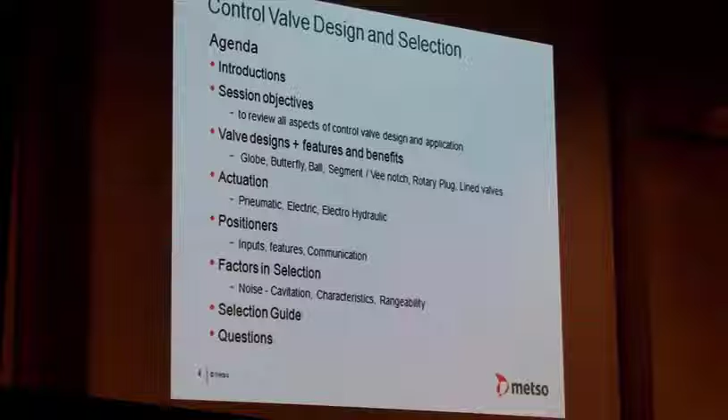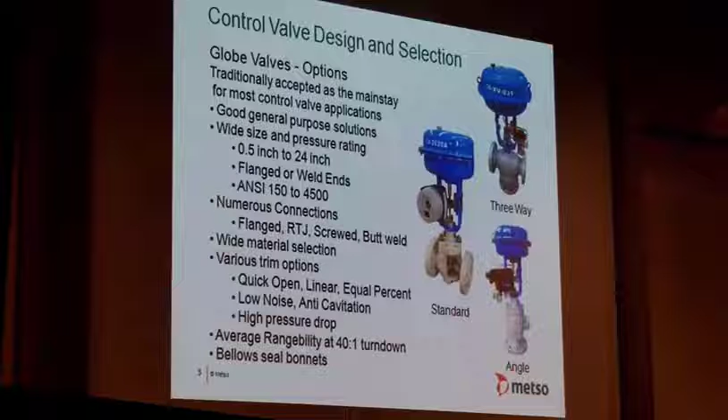Okay, moving on now, the first one is going to be your globe valves. Globe valves have traditionally been accepted as the mainstay for most control valve applications. Wherever you go in industry, whichever plant you're on, you're going to see loads of globe valves around. They've been there for years and years, and historically they've done a really good job. So they're good for general purpose solutions.

When you see them, you're going to see them in three forms. The first one is the standard format—here you've got your globe valve body and your actuator. Globe valves are sometimes referred to as linear valves, because the action is a sliding stem to lift them in and out. So here you've got your globe valve, your linear actuator, which is a diaphragm in this case, and then your positioner on there. I've got a little valve I'll pass around in a minute so you can have a look and see what one looks like on the inside, and then you'll understand what I mean.

This is where they come in really, because they're a wide size range and a wide pressure range. These things have been around for ages, so they've been designed to do all applications—typically half an inch up to 24 inches is the kind of size range you'll see for globe valves. But you don't want to be buying 24-inch globe valves unless you have to, because they weigh absolute tons—just massive things.

So here's where I'm suggesting you think about different options when doing your valve selections. Typically flanged or weld ends—the weld ends you'll tend to see predominantly in the power industry, so if any of you work for power plants, you'll see them there. But normally they're always flanged. Pressure ranges go from ANSI 150 up to ANSI 4500. Some might think ANSI 4500 is quite high pressure, but if you've worked on polyethylene plants, the reactions take place at around 3000 bar, so you need control valves that operate at those pressures.

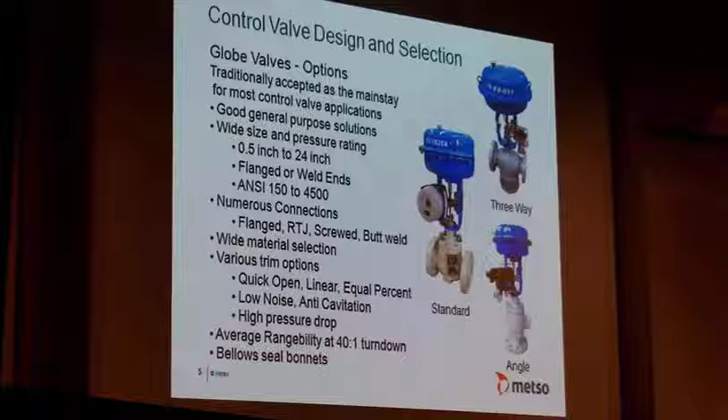The other area where you need to be careful with globe valves is if you're dealing with a very light hydrocarbon, because the gland systems are never particularly good - as the valve is opening, the stem will actually drag the products out with it. So what you end up doing is putting bellow seal bonnets on. Bellow seal bonnets cost a lot of money, and they're very limiting in the number of cycles you can have.

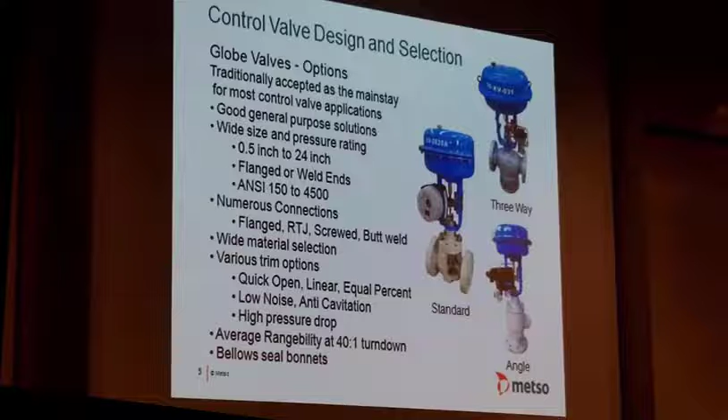So here are the three forms: standard globe valve, and occasionally you're going to see an angle globe valve. You're only going to see angle valves on the more aggressive applications, the specialist applications, and also on three-way valves, where you might be doing a job involving heat exchangers, or maybe tanker loading systems. So those are the sort of things you're going to see them on.

Moving forward to what's actually going on inside - if I pass this little demo valve around, the valve coming around is what's called a top-guided unbalanced control valve. The idea is the flow will come in underneath, and the plug is just a plug, like a piston, so whatever pressure is acting on the underside of the plug has to be taken care of by the actuator. So you have a limitation there, and then the flow will exit through the valve and come out. It's not as heavy as it looks - it's made out of plastic, so it's nice and light. Pass that one around as you go.

Now, here we've got the new designs of valves, but here we've got the old-fashioned designs. I'll leave this in my presentation because when you go around a refinery, you'll find hundreds of these things, and the actual refiners love them. The reason being it's very old, very simple, very robust, and maintainable. As a manufacturer, the idea is you want to make it simple, cheap, and economic to manufacture, but by doing that we've brought limitations in. So you have to weigh up the limitations now versus the old technology.

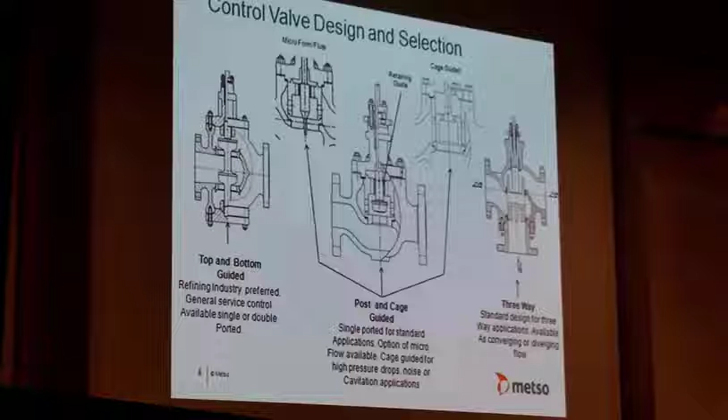So you take your pick. I think the only time you'll be using the diverging flow in a different application would be on something like a tanker loading system, where your flow would be coming straight through the valve, and then as you open this port it will allow you to discharge the flow into the tanker. So that's when you will be seeing that sort of construction.

Now moving forward to the angle valves, as I say, you won't see these very often. They tend to be for very specialist applications. So here we are talking about applications like compressor anti-surge valves, high pressure gas letdown valves, wet steam letdown valves, and boiler feed water control, where you'd need multi-stage trims.

Now with angle valves, you've got two ways of using them. If you're going to be using them on a gas application, the key factor within the valve is going to be velocity, because normally on a gas application you're talking about noise, and you've got to keep the velocity down to 0.5 Mach.

So what they will do on a gas valve is have your flow coming in from the underside. Typically here, you can get different sizes of bodies and trims.

An application I'll give you is one I did about 2 years ago for Valero Refinery, where they were looking for a valve on a wet gas compressor. Basically you've got a 16-inch outlet, with quite a high pressure drop, discharging to flare. So to keep the velocity down, they ended up making the outlet a 24-inch outlet. You basically fabricate the valves to suit all these different combinations.

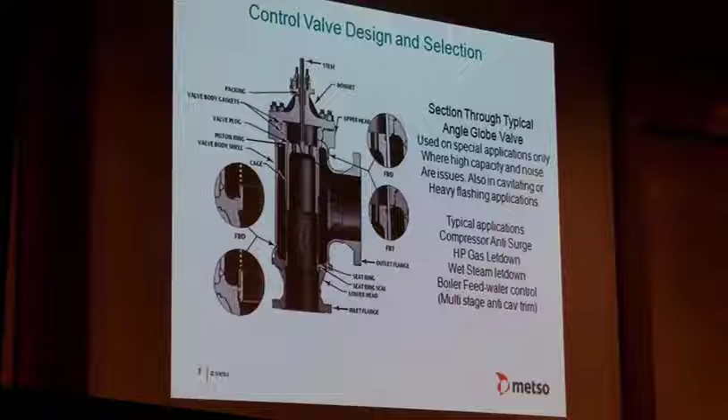Now if you're working on another application, which might be difficult, say wet steam - wet steam is extremely erosive. So instead of running it the normal way, where you'd be discharging the wet steam into the body of the valve and wearing the body away, instead you bring the flow in from the horizontal side, through the trim, and discharge the wet steam straight out. So where the flow stream exits the valve, it's ejecting straight out, not wearing away any of the castings or bodies. It's a simple construction to do.

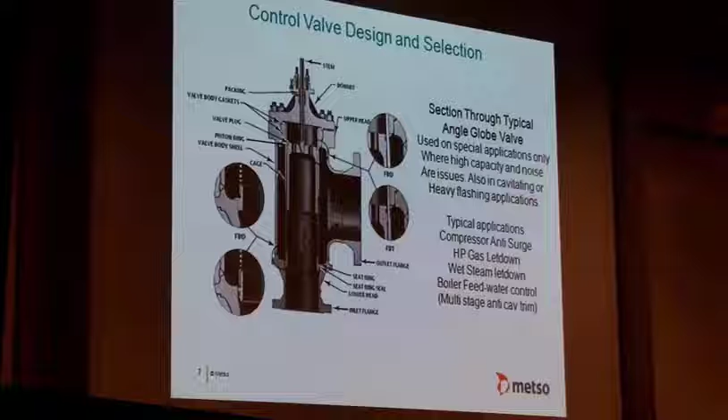And if you're looking at applications with multi-stage trims, instead of having a single trim, you will have multitudes of trims coming down below. Fisher, for instance, do a Cavitrol 4, which has 4 separate stages coming down, and that will allow you to drop 160 bar pressure without generating cavitation in the trim.

Excuse me sitting down, I've got a trapped nerve in my back.

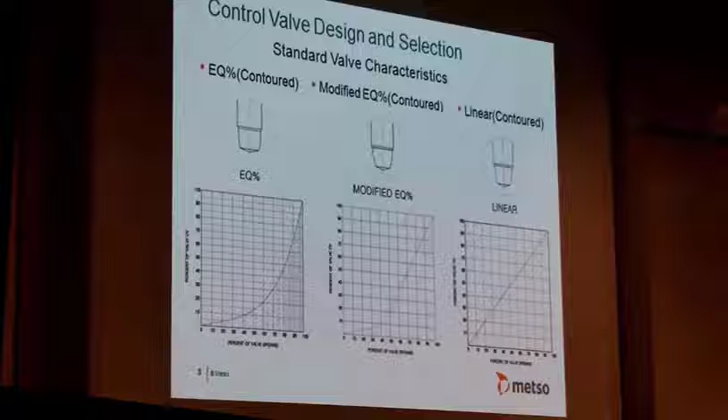So the manufacturers came up with this idea, and it was like a halfway house, meaning you could have one valve that would do all different applications. It's a bit of a cheat, but you get away with it. But what you'll find is that most people will specify these trims for the applications, because that's what's traditionally been used. The history of these characteristics goes back to when you used to have pneumatic control systems.

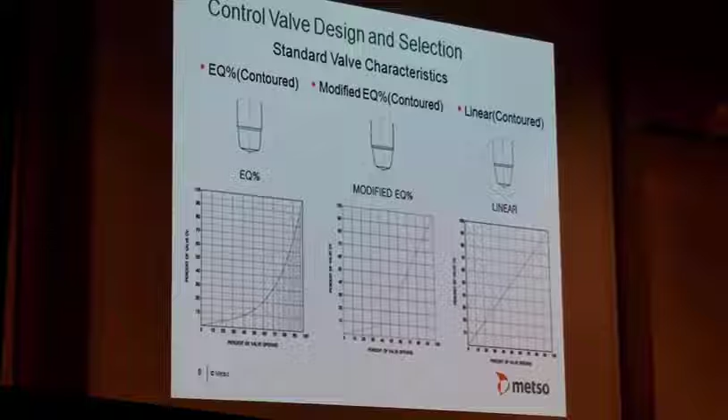So when I used to start, you had a blind controller, as it was called, just downstream - the old Fisher Wizards. They used to measure the pressure, and to get the right performance of control, you had to modify the trims, modify the characteristic to deliver what you want. In modern DCSs now, you can basically do what you want with any of the trims just by doctoring the output from the DCS. But we like to stay with tradition.

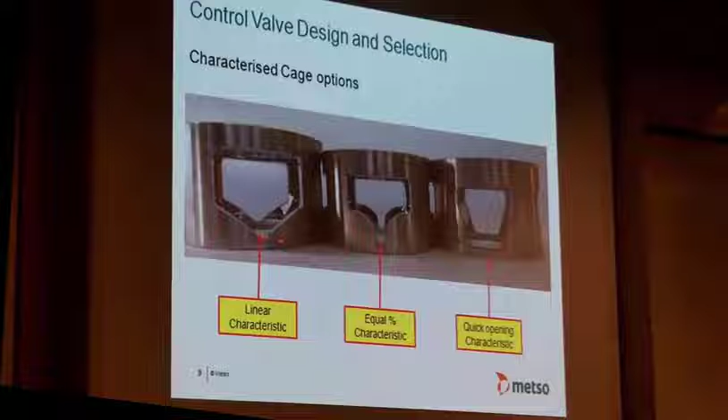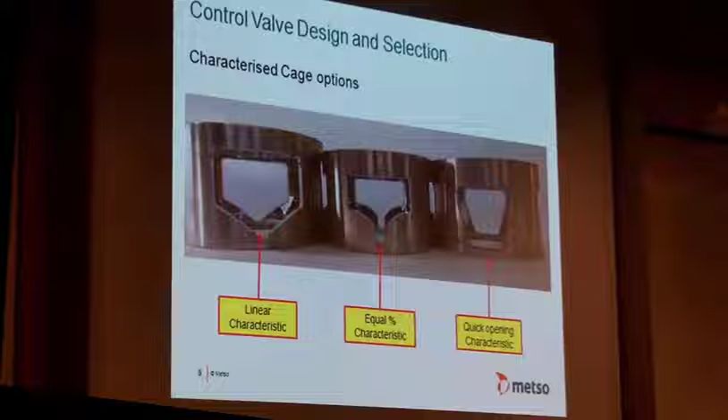Now, when you've got the cage-guided valves, which is the balanced construction, the actual characterization is done by profiles which are in the cage of the valve. Here you can see a linear characterized cage, an equal percentage characterized cage with this rather strange curvature, and then a quick opening one, which is the kind of trim that you've got in my little demo valve that's been handed round.

So that passes on from the globe valve side. The next section we're going to be talking about is butterfly valves.

Butterfly valves, I believe, have been quite misunderstood over the years, because originally when they first came out, salesmen were selling them for all manner of applications, whether they were right or wrong. The reality was they got a really bad name about 25 years ago, and people started saying, I'm not buying them because the control is rubbish.

But if you buy a butterfly valve which is selected for the application, then you get a unique thing, because you can have really large sizes of butterfly valves that weigh half the weight of a normal globe valve and are like a third of the cost. So there's a large amount of money to be saved by considering butterfly valves, providing you select them for the right application. They're available in various forms - some are for control and some are for isolation.

Good for general control, but here's the buzz, if you like - you've got to be careful with the pressure drops. Some people will tell you can handle 10-15 bar pressure drops on a butterfly valve, but my gut experience is just to stay around about 5 bar, because what happens with butterfly valves when they're working is you get turbulence forming around the backside of the disc, and that turbulence will cause oscillation, which will then be reflected in the control. It will also be reflected in the maintenance levels of the valve, because you'll start to shake the valve to pieces and wear it out.

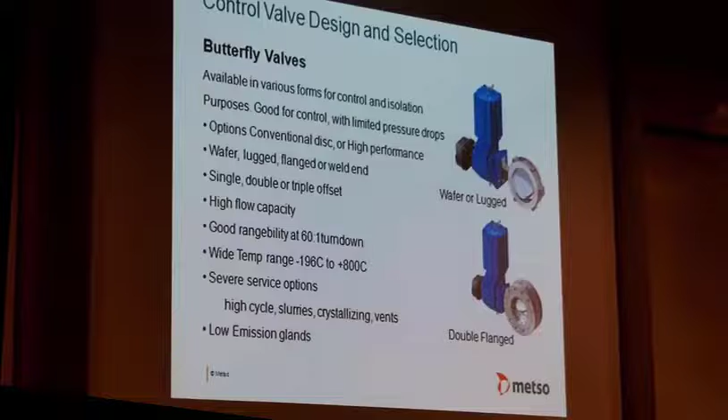And here's the other thing as well now which is coming in. If you think about what we said about the globe valves with the rising stem, where you're going to get product coming in, being drawn out with the stem - with a rotary valve, it's a little bit like the engine in your car. You very rarely get leaks from your engine nowadays, whereas you're always going to get leaks from the linear side of things. So it's a simple option.

So I'll pass this valve around now. The valve I'm going to be passing around is a triple offset butterfly valve. When you're having a look at it, have a look at the actual contours on the disc, because it'll help you understand how the process works as we go through the slides. It's a little bit heavy, sorry about that.

Now the original butterfly valves are what we called conventional disc. So here you've got a standard disc, and basically it's just a straight, simple form. And then the shaft is central to the disc, so as the disc is actually rotating, it rotates centrally to the shaft.

On your original butterfly valves, which were used on things like dampers, there was no kind of seal on there. So where the problems started to come in is that somebody came up with the idea to fit rubber liners onto valves. To a degree that was the kiss of death once they started to do that, because it caused that much of a problem. They've overcome it now because they're sensible in where they use them, but originally it was being sold for everything. Using this technology to get shut off, they had liners, normally made of things like neoprene or

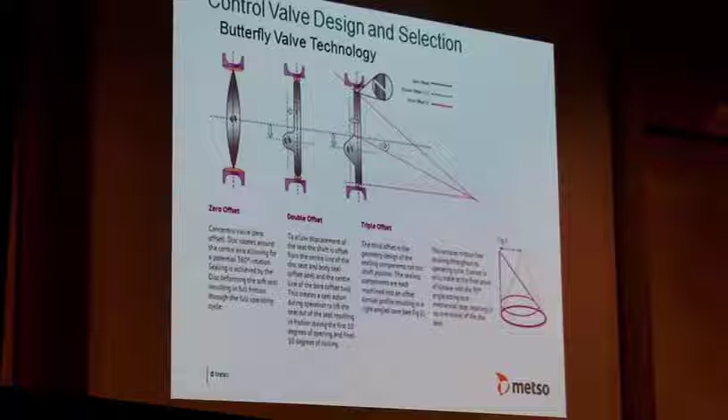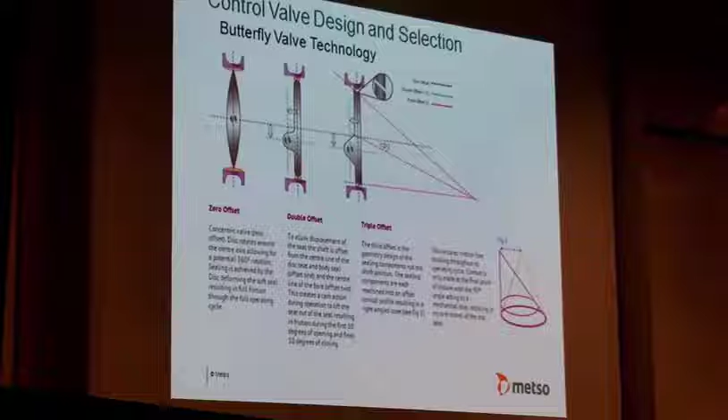So what that means now is we can use extremely hard seats. The seat you've got there is almost like solid lumps of metal. With that, you can get bubble tight shut off at temperatures up to 600 degrees centigrade, and also extremely good control. This is the evolution of your butterfly valves as you're going through. So if somebody's talking to you about triple offsets, at least you'll understand a bit more now as to what it actually means and what it's all about.

Moving forward now onto ball valves. A lot of people don't normally consider a ball valve as being a control valve, but we supply large amounts of ball valves on control applications because when this thing is open, it's a full bore pipe. So size for size, you can have something that's a third of the size of a monster globe valve and still give yourself good control.

The key issue is that you need to be careful about the drive mechanisms. A normal soft seat ball valve has a very crude linkage that might have something like 5 degrees of deadband. In a control application, you might find the actuator moving 5-10 degrees with no actual change in control in the valve. So we don't normally consider a soft seat ball valve as a control valve, but when you look at the metal seat valves, they come with spline drives and keyway shafts, so you're looking at virtually zero backlash in the linkage systems.

Now you've got all different kinds of options to consider. I don't use these as a normal everyday control valve, but I do a lot of work on refineries where we might be debottlenecking a plant. If you've got a plant you need to debottleneck, you can either rip it out and start again - huge amounts of money - or, if you can put a valve in that replaces your globe valve without any changes, you'll immediately deliver another 60% capacity with no change.

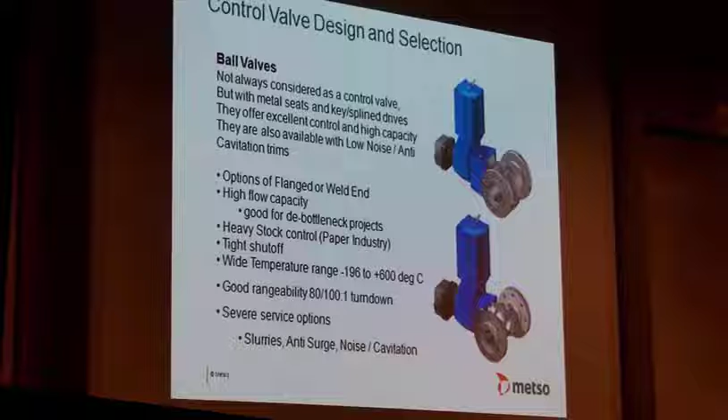So consider all the options. Great for debottlenecking. If anybody's in the paper industry, they use a lot on paper stock, which is almost - if you've got a bucket full of paper stock, it won't come out if you tip it upside down - you can handle that kind of stuff with it. Tight shut off if you need a valve to be an isolation valve as well as a control valve.

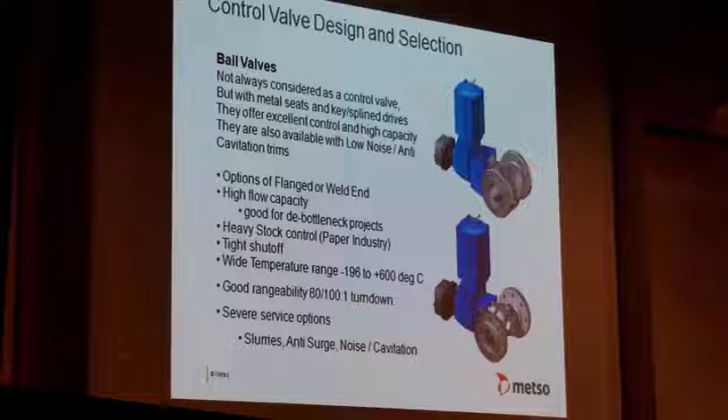But here's the rub - rangeability on the ball valve is 80 to 100 to 1. So now you're looking at double the capability of a globe valve for control, so you can get extremely sensitive control on them. Very good on severe service applications too. And with some of the valves, you can get them with noise and cavitation trims, depending on which manufacturers you go for.

I put this one on just out of interest. Does anybody do any work on crackers, anything like that, where you're dealing with catalyst handling systems?

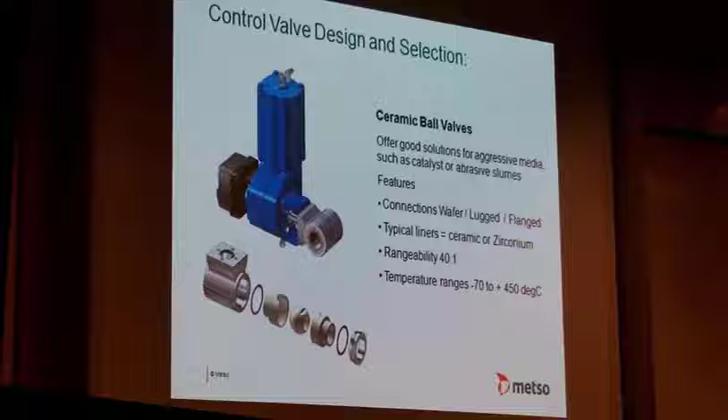So ceramic ball valves, all the internals here are made out of zirconium silicate. So if you do have any applications where you're dealing with extremely abrasive things, don't just put something in that you've got to keep servicing every 6 months. Consider a ceramic ball valve, because they'll give you really good control, but they'll tolerate all manner of crap and horrible stuff. And as you can see here, minus 70 to plus 450, so they're going to cover most of the applications that you guys are going to come across.

Next one is the segmented ball valve, or V-ball valve. I'll pass this one round. Now, the valve itself originates from the paper industry. Most people think it should stay in the paper industry, but I find that these sort of valves are extremely useful for a lot of different things. But once again, you need to select them.

Now, by segment, basically what it is, it's a quarter of a ball. So where you would have a normal ball valve, which would be a solid ball with a hole through it, this thing's only a quarter of a ball. Say within the paper industry, the idea of it is that you can handle paper stock and control, and it won't be bothered at all. It will just shut off and open up. Nothing gets stuck, nothing gets jammed, and away you go.

But say you can use them for other things as well, because they're extremely good on steam. They're extremely good if anybody's doing any work where they want very, very fine control. So blending systems and things like this, if you're dealing with any blending systems on any plants, they're extremely good on there. And also I like to use them as well on gas control systems.

The tradition for a gas control system is you'll have two valves. You'll normally have a pilot control valve. This is, shall we say, for a furnace. You'll have a pilot control valve which is going to be delivering the flow just to keep the thing ticking over, and then you'll have a secondary valve to take it online. Now the problem is when you change it from one valve to the other, you've got a big jump in the actual control side of things.

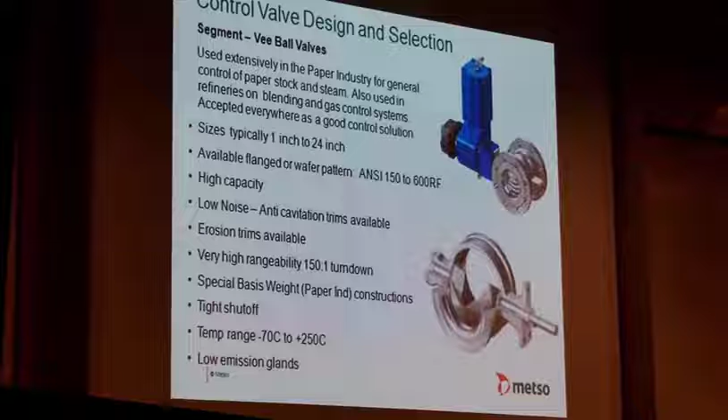So you can fit these valves with actuators that will deliver 14,500 discrete steps over a 90-degree rotation. So if you come across anything where you need absolute superfine control, which is something you'll get every now and again, then it's easily achievable by using this sort of style of valve.

Okay, next one we've got is rotary plug valves. So these things have been around for many, many years now. They were originally introduced by a company called Masoneilan. And when they first came out, they brought them out under the guise of the rotary globe valve. And they were extremely successful when they first came out. So people were putting them in all manner of applications.

But going back to the thing I said to you earlier on when we started off, you need to select these valves within the application capabilities they have. So originally people were putting them in for things that they weren't really suitable for, so then they start to tail off then on where they're used, and they start to have problems with them. I think the original valves as well, because Colin used to work for Mason, didn't you, Colin? The original valves were also going to be, if you like, wafer valves, and wafer valves in a chemical hydrocarbon environment are just a total no-no.

So they sort of died out. You still see them every now and again, but they're dying out. But they're still available in various guises. So the way that they operate, I'll just hand the little valve around. So instead of it being a ball, this thing's actually got a plug. So you can see here you've got a plug, and the plug will rotate to cover or uncover the port. So that is where you get your actual control capability on this design of valve.

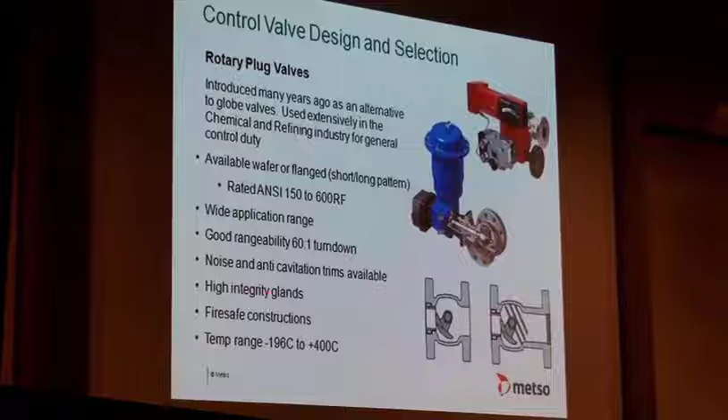So noise trims and cavitation trims are available in these designs of valves. Here's where they come into their own - high integrity gland systems. So anybody's got applications where you might be dealing with hydrocarbons - one application I bring to mind is we do a lot of work on hydrogen. So 20 bar hydrogen at 400C, zero gland leaks with a standard valve. You don't need to do anything special around bonnets or anything like that. So if you've got any tricky processes, worth considering this design of valve because of the gland system. You can also get them fire safe as well, because as soon as you put graphite gland systems in these valves, they become fire safe easily.

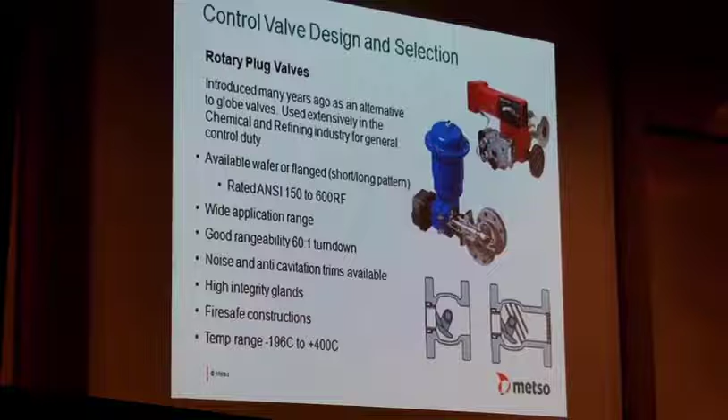So I wouldn't suggest you use these for all applications, but hydrocarbons or anything where you're dealing with hot oils, thermal fluids, excellent for those sort of things. You'll find a low-cost solution for a difficult problem.

I always put this one in. A lot of people say, why have you got sort of lined valves in there? But when you're looking at applications where you might have a very aggressive media - could be carcinogenic or whatever - then you can either put materials in there which are going to be exotic alloys, or you can consider using the lined construction for your valves. Now, I wouldn't suggest you use them for all applications, but what I've always found with corrosive applications is a few degrees temperature change makes the product extremely aggressive.

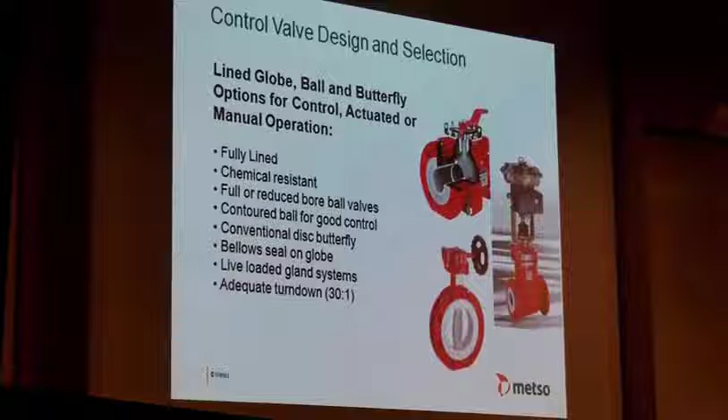An example - some years back I supplied a Hastelloy segmented ball valve. It lasted 7 days. And when we found out what it was, the temperature was 8 degrees up on where it should be, and it just wiped it out completely. So if you've got applications where you're dealing with really aggressive chemicals, instead of just considering all the expensive alloys, think about putting a lined valve in.

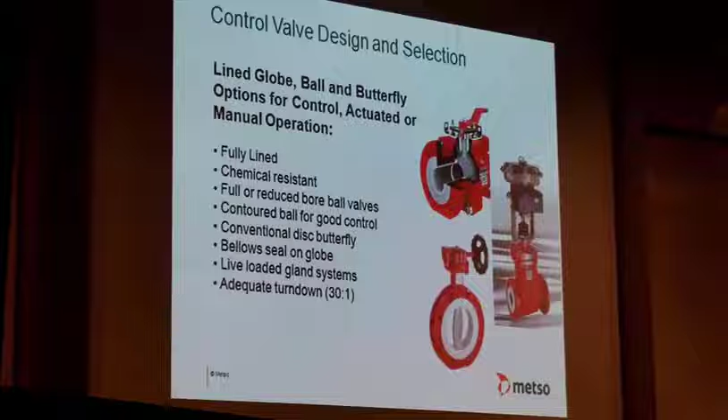So the ones we've got here are Richter. Those are the ones I normally use because they're good quality. So all the valves - whether you've got a ball valve, a butterfly or a globe valve - they'll all come PFA lined, and they'll tolerate all manner of really nasty chemicals. You just have to be careful with the temperature capabilities on lined valves, because you're limited up to about 160-170 before the liners start to fall down on you. So quite useful to get you out of trouble when you've got some really nasty chemicals there.

That ends the section on the valves, so we'll be talking a little bit about the actuators. Now, actuators are going to come in two sort of forms for us - you've either got your rotary actuators, which are going to be on the top for your rotary valves, or you've got your linear actuators down below.

Now, when we're talking about control valves, I like to think about the actuators being control actuators. So quite often I'll get people that are going to be trying to fit a rack and pinion style actuator onto a rotary valve to give you control. But you're on a loss from straight away. It might be cheap, but the amount of lost motion that you're going to find in the linkage systems, the control is going to be absolute rubbish.

So always consider your actuators to have a good drive mechanism. We work on the Scotch yoke principles, where basically you've got a piston which will be a linear piston, and then you'll have a double lever mechanism here to give you your conversion to rotary motion.

So within the actuators you can either have a diaphragm form, or you can have them in piston forms. So here's the spring opposed piston, the spring opposed diaphragm. Now it's kind of strange really, because when I first started in the business, every actuator was always going to fail open or fail close. And what it is, it's a throwback to the old diaphragm actuators that we used on the globe valves.

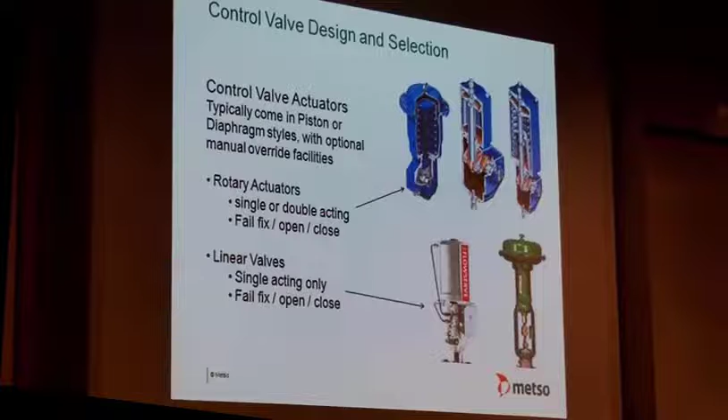So here you've got your spring. This is one that's going to deliver you fail open or fail close. This one's your double acting actuator. With the diaphragm styles, quite often you can get them so fail open, fail close - just pull the actuator off and turn it back around and it goes back on again. So you don't have to worry so much then about having a fail open or fail close problem. If you've got it wrong when you order it, you've still got the chance to change it.

So these are going to be things - you've got your double acting, fail fix, spring open and spring close. So for linear valves, the traditional kind of actuator tends to be a diaphragm style. So here what you've got is a diaphragm inside a casing, and then inside here you've got a spring, and the spring will be delivering your failure mode and delivering the power to fail it.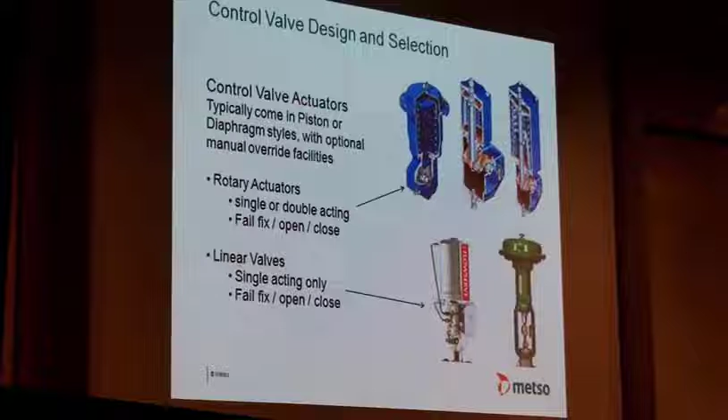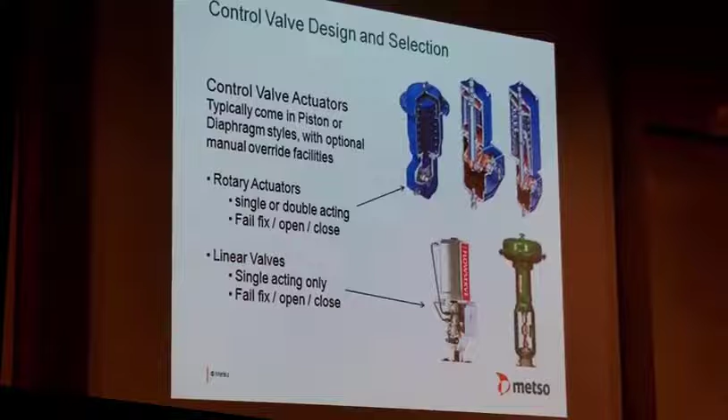Now, anybody remember the term bench set? Well, when I first started, things like positioners weren't available on valves, so what people used to have to do, they had an actuator with an adjustable spring. So whatever the pressures were downstream, you actually adjusted the spring to compensate for that pressure so that it would stroke 3 to 15 psi over the pressure range that you were working. Nowadays, people don't have the adjustable springs because they've all got the positioners, and the positioner compensates for that. So this is what your normal diaphragm actuator is going to look like.

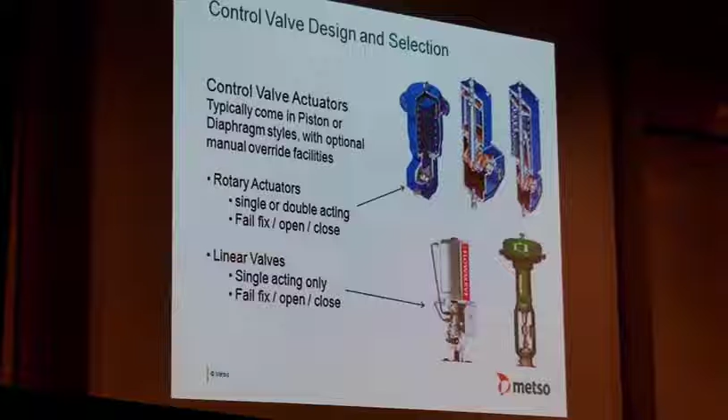Occasionally you're going to see piston style actuators. Now the piston style actuators are quite good, they offer quite good control and they're relatively small for the amount of power you get out of them. But what you have to be careful of is some of the piston actuators actually use the air to assist the spring. So if you get anything where the air leaks away, your spring capability to fail in an emergency isn't necessarily going to be matching exactly what you wanted. So although there's benefits from a size on this, sometimes be careful when you're dealing with supercritical applications because you might find you haven't got the backup of the failure mode there.

Now actuators are available for electric or electro-hydraulic. Quite often I'll get people that will ask me for electric actuators, and you'll say, well, why do you want an electric actuator? And they'll say, well, it's easy, I've got power. But you have to be very careful with your selections for an electric actuator.

So the bottom one we've got here is a standard electric actuator. You've got a motor here, then you've got a gearbox inside, and then you've got limit switches and torque sensors and this kind of thing. And you've got a manual override.

It all seems very nice and very compact, but the reality is with these sort of things, if you lose power, the thing just freezes - it stays where it is. Now you can get battery backup systems, but battery backup systems aren't suitable if you're in a hazardous environment, so you can't do it. You can be in trouble there, so select an electric actuator if it's feasible, but I wouldn't suggest you sort of do it for normal things.

If there's no air available, then you're going to be driven down this road. You can get them for linear valves or you can get them for rotary valves. The rotary one will literally - the gearbox will just rotate 0 to 90 degrees to give you your control mode. But if you've got a linear valve on the base of it, then what they'll do is machine a helical bush to the thing, and have it rotating continuously.

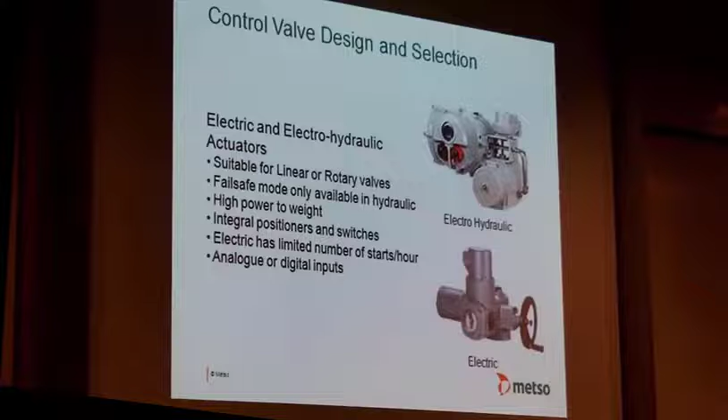Anybody done any work on SIL, Buncefield, that sort of stuff? These sort of things now are pretty common on there, because you've got a tank farm in the middle of nowhere, you haven't got any air, so they'll put the electro-hydraulics on there to deliver your failure mode for your valves - it's a secure way. They're SIL qualified. Rotork, Skilmatic do them, so they're all available for that sort of thing.

Positioners are the next one.

Now, as I say, when I first started, an actuator on a valve would just be a diaphragm actuator and a valve, and then you'd have a pneumatic controller downstream doing the control. Now, those sort of systems were quite robust and they worked quite well, but dependent on what was going on with the maintenance, or dependent on what was going on inside the valve, then you were in a situation where...

you might have friction building up inside the valve. That friction would then mean that the valve wouldn't be stroking as it should stroke. So you might find the valve didn't stroke its full movement, or it might be moving in jumps. So what they came up with the idea then was to put what they call positioners on.

Now, positioners are basically servo devices. It's a bit like the brakes in your car - you stamp on the brakes, and your car that weighs 2 tons stops on the smallest bit of pressure. It's the same with these sort of things.

They just amplify whatever air is going to be in there. So you buy them normally pneumatic, or you buy them electronic. On the pneumatics, you feed them with the 3 to 15 signal, and whatever air supply you feed the positioner with, which could be 4 bar or 6 bar, they will then allow that onto the actuator to deliver all the extra power to give you control.

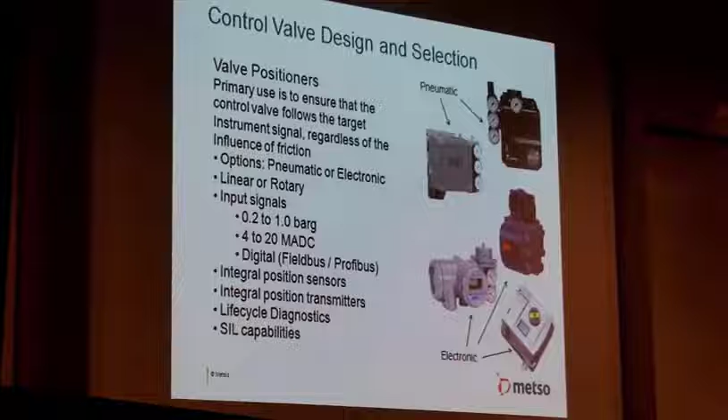And here's the other thing as well - a lot of people now are asking for the control valves to be part of a SIL loop. So you get positioners as well which are SIL qualified. If you're on an existing plant, you can actually utilise the control valve to aid the SIL system and save yourself some money.

So yeah, we've now finished all the valve and actuator side of it. So just a quick flash through here on your rangeability - this is just a quick recap.

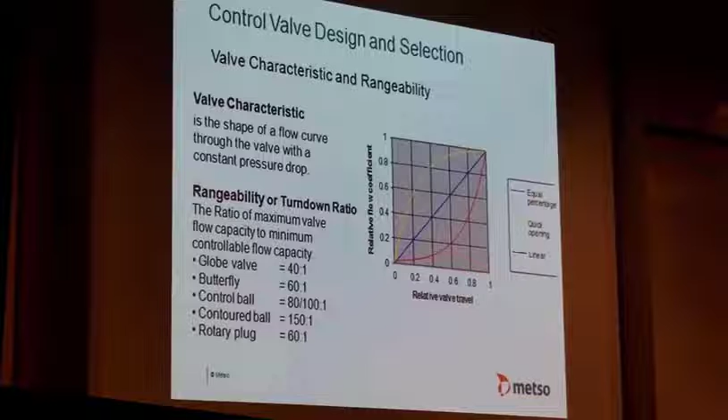So your globe valves are 40 to 1 turndown, butterfly valves 60 to 1, control ball valves 80 to 100 to 1, and then you've got your contoured ball, V-ball going to be 150 to 1, and your rotary plug there. So you can see you've got lots of room to manoeuvre to pick and choose what valve you want for the applications.

And then here's your characteristics, so you can see just a quick recap on your standard characteristics you've got there.

Next section is going to be on noise and on cavitation. Anybody had any disaster areas with any of these sort of things? Nobody owning up?

Now I like to think of noise and cavitation basically, a simple term to me, it's like excess energy. In the older world, quite often you'd have pump systems and you'd have to drop all the pressure across the valve and then discharge it into the plant. Nowadays they're putting all these variable speed drives on there, which is alleviating a lot of the problems around here. But we still get these problems, and you still need to be very careful, because anything to do with noise and cavitation can be terminal for the life of your plant.

Now, noise nowadays, when we're doing the valve sizing calculation, you press a button and out pops a noise calculation, so you get your noise calculation.

It's nice to understand where the noise actually comes from. When I first started, we didn't have all the sophisticated tools. We did the sizing by a slide rule, and at the end of the calculation you thought, that's okay, but I wonder if it's noisy or not, because there was no determination from the slide rule. So then you had to do a manual calculation, and what's interesting is it puts it into context as to what it is.

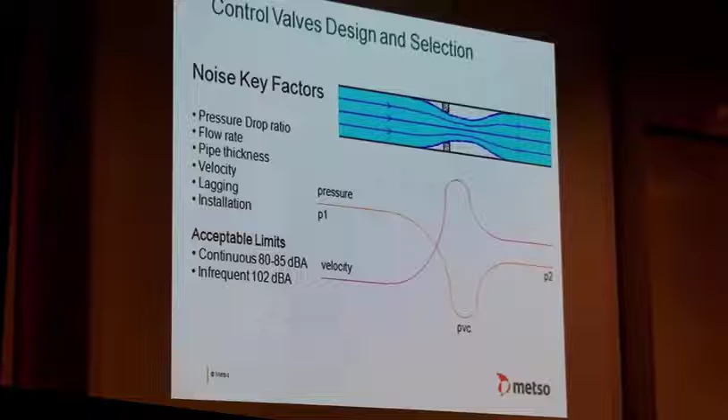When I worked for Fisher, one of the guys doing the training came up with a novel way of explaining noise, because these numbers don't really mean anything, they're just fictitious. 80 decibels is a normal office environment - like a receptionist or typists, that's the kind of noise level 80 decibels is. So when people start asking for 80 decibels, it's nice to put it into perspective as to what you're actually trying to achieve. 85 decibels is like down the side of a relatively busy road or street. 102 decibels is a lady's hairdryer - would you want to be in an environment with a hairdryer stuck to your ear 24/7? No, you wouldn't. But at least now it gives you an indication of what these noise levels are, rather than just having the numbers there.

With noise, we've got two ways of working it. Within the valve world, we work on what's called source treatment, where we treat the noise at the front end - the idea is we don't want to create the noise, so we treat it at source. On the other hand, if you've built a plant and it's really noisy, you have to go to what's called path treatment, because now you've got a problem you've got to fix. So from the source treatment, at our end, you've got special trims within the valve, which give you velocity control and acoustic control.

Location control is pretty critical. I'll give you an example of that in a minute. Good piping design helps, or you can use what we call resistors or diffusers, which are devices like fixed orifices. These are limited because, being a fixed orifice, they'll only have an effect on one process parameter. So if you've got three flow rates, it's only going to work on one of the three.

The example I'll use here is a paper mill that was built in Manchester not long ago. Paper mills now aren't just paper mills, they're actually power plants with a paper mill attached. So they've got a monster power plant with gas turbines and a couple of other waste gas processes, all generating power.

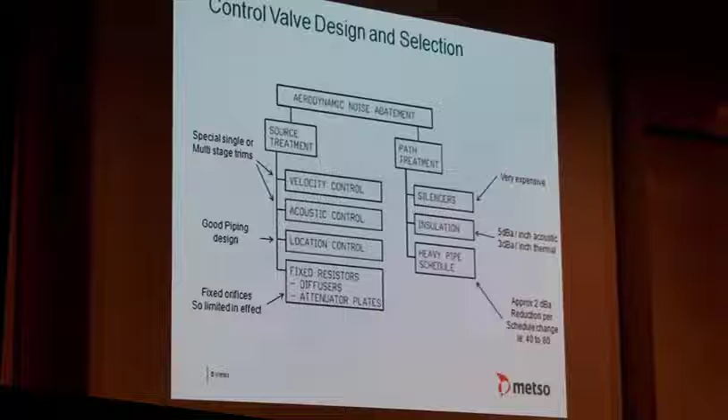So because of a mistake made at the front end, the costs afterward were astronomical. Where you can, always make doubly sure you treat it at the front end, because anything afterwards is going to be terminally expensive.

What you can also do is use the pipe schedule - typically it's 2 dBA reduction per schedule change, so going from schedule 40 to 80 gives you 2 decibels. If you look at insulation, it's 5 decibels for acoustic lagging, or 3 decibels per inch for thermal lagging, all of which will help you get where you need to go.

Here are some of the trims you can use within the valves. Ball valves have these special baffle plate mechanisms with loads of little holes in them. The idea is that you're introducing friction - friction absorbs the energy, and energy reduction reduces the noise. So it's straightforward: the flow comes in and has to fight its way through all these baffle plates and holes, absorbing energy and reducing the pressure.

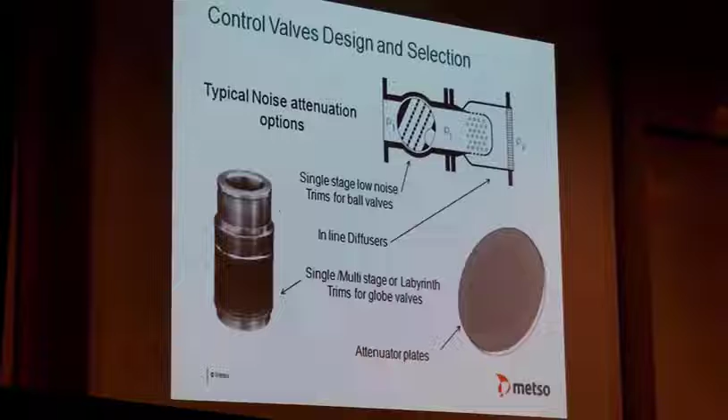Downstream, you'll occasionally put what we call diffusers, which are tubes with holes in them, and baffle plates with holes in them. This is what goes on in a rotary valve, but in a linear valve you have multi-stage trims with lots of little holes drilled in - very expensive to produce, very high spec engineering. Then you can add attenuator plates, like an orifice plate with loads of little holes in it.

Next is flashing or cavitation. Whereas noise is expensive, cavitation is extremely damaging - you need to avoid this like the plague, because valves will disintegrate within days if you don't treat them.

So here you've got your pipe, and in the middle an orifice plate representing the valve. To pass flow through a valve, the flow comes in, and where the pressure drop occurs, the flow accelerates as it crosses the trim. This point is called the vena contracta within the valve, and at this point you get a change of state inside the liquid - the pressure inside the line reduces dramatically, quite often dropping below the vapor pressure of the liquid, which is where you get your problems.

So here you've got the liquid coming in - at this point it's at pressure and it's liquid, so the flow comes through. As the pressure goes through the valve, it drops, and quite often drops below the vapor pressure.

So inside the valve you've now got vapor formed, so you've actually got little pockets and bubbles in there of all vapor, which is the cavitation. Now if the pressure is allowed to recover, which quite often it has to do in the process to get the pressure back up again, it exits the valve with what we call cavitation, which is very damaging, as I'll show you in a slide in a minute.

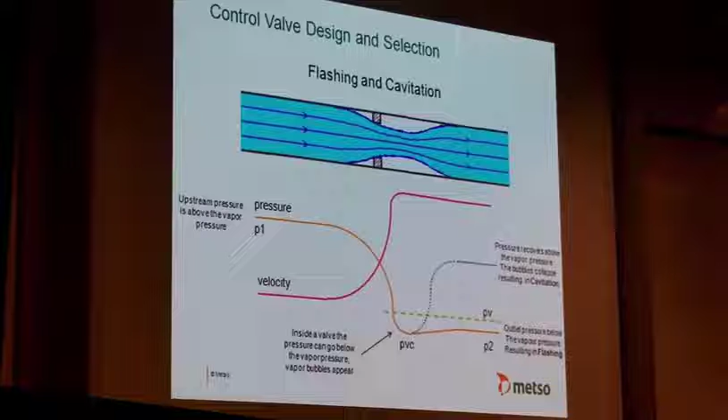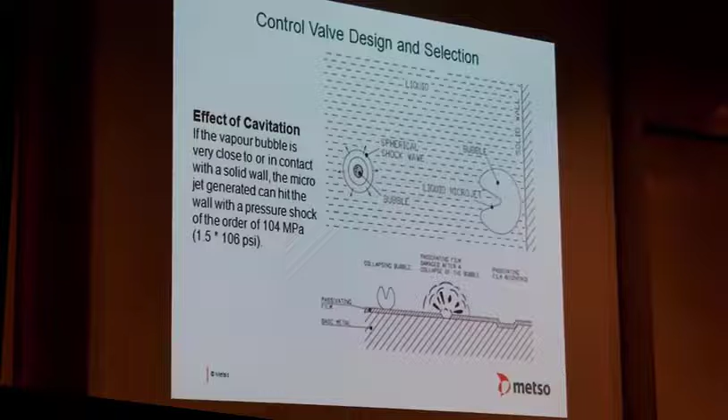On the other hand, if you're dropping straight out to an open tank, it's going to change itself to flash, so it will stay in a vapor phase, and you'll end up with a very wet steam coming out of the valve, which can be extremely erosive. So both of them are as bad, but the flashing can be accommodated within the valve. You've got to be very, very careful with the cavitation.

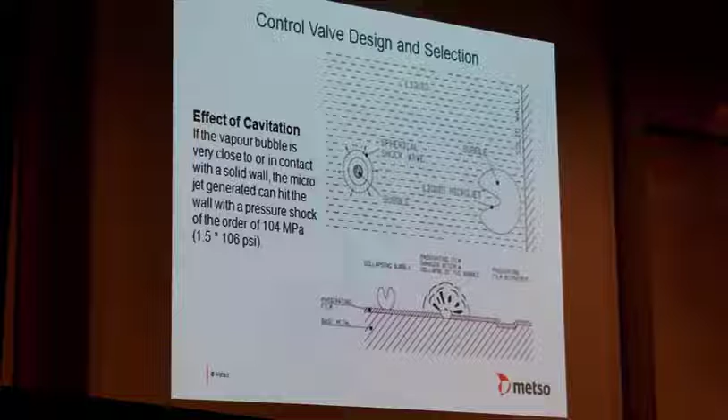Now this shows you what happens. Here you've got your vapor bubbles formed inside the liquid, and then what happens is as the pressure recovers on the outlet of the valve, these bubbles will actually implode. But when they implode, they release a massive pressure, so you get a 104 megapascal shock wave taking place from each of the bubbles as it implodes.

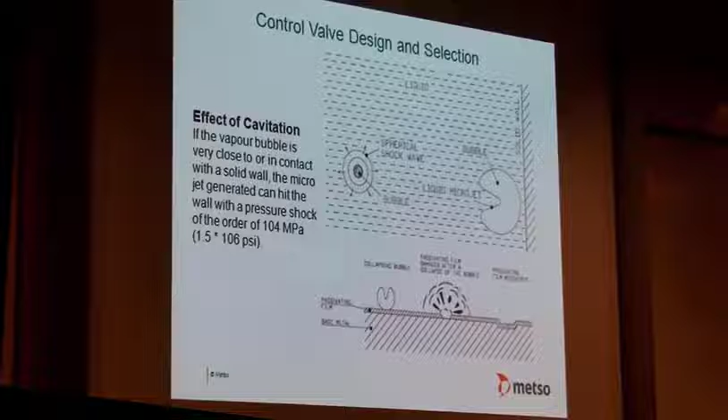Now, if the bubbles are contained within the flow stream, it doesn't cause that much damage. But of course, the liquid is going to be all around the inside of the valve, so where the bubbles implode anywhere near the metallic surfaces of the valve, these bubbles will literally rip chunks out of the actual metallic structure of the valve. So you're going to be talking, as I say, 7 days and the valve will be trashed completely, throw away. So you don't want that sort of thing.

Now, we had a very clever guy working for us some years ago called Jouni Pyötsiä, and as his doctorate, he developed a way of predicting how cavitation was going to be. Because cavitation is a bit like a black art - if you've got it, people say you've got to avoid it. But the reality is, if you think about your cold tap at home, you open your cold tap, it's banging and crashing. That's actually cavitation, but your tap doesn't collapse.

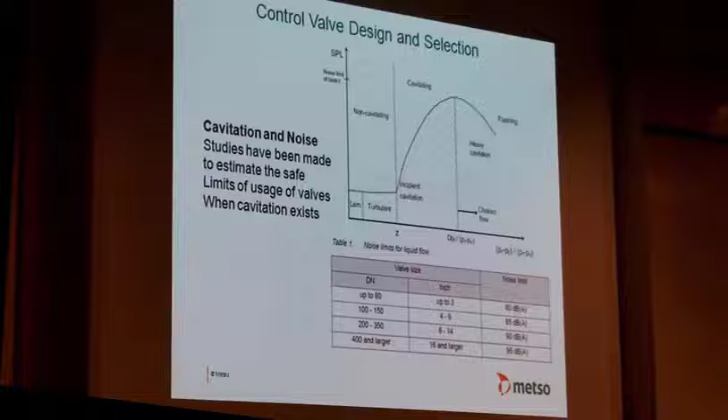So what we found was, he found that there was a relationship between noise and the aggressiveness of the cavitation. So by making sure that your calculations are within the noise levels, you can predict that you're going to get some level of operating capability within the valve, even though it is cavitating. Because quite often, the cost of an anti-cavitation valve can be horrific, so if you can tolerate it, then tolerate it.

So here you've got different sizes of valves, and then you've got different noise levels that you can sort of work up to and still get a reasonable life out of the valve. So those are the relationships he's got.

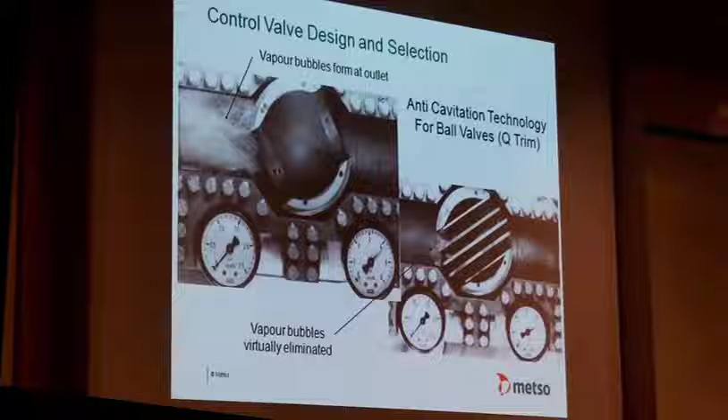So it's quite an unusual thing to see that happening, where you've got positive pressures but no liquid exiting the valve. And then here we've got one of the baffle trims that go inside the ball valves. You can't see them, but these trims are full of drilled holes. Now what you're doing, if you like, is reducing the pressure in stages, so you're never actually reaching the point where cavitation exists. So here you've got 4.5 bar down to 0, and you can see there's no vapor bubbles formed on the outlet. So you can actually see what goes on inside the valves.

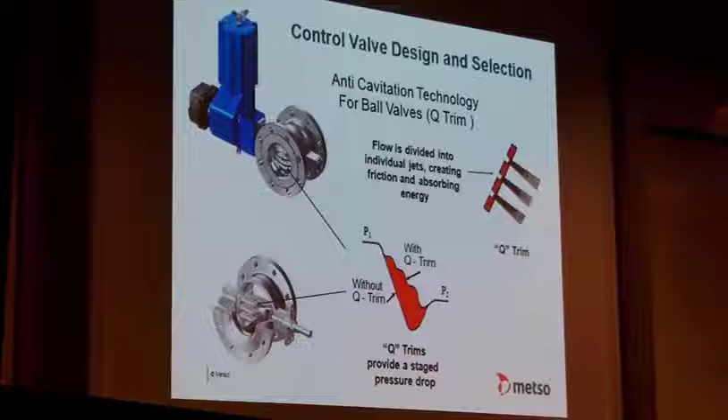Now within your rotary valves, you've got the technology of these baffle plate systems. There's various manufacturers that do them. The way they work is the baffle plates go in here with all little holes drilled in, and it actually reduces the pressure in stages. So instead of dropping below the vapor pressure, you're coming down in steps and not actually creating cavitation. Quite a successful way of doing it, but it has limited capabilities, whereas the globe valves have the capability to stand 160 bar pressure drops. The rotary valves won't do that, but for a lot of environments it's quite satisfactory to get you through there.

Now here's where you start to get into the sophisticated trims for your globe valves, because you've got all manner of multi-stage trims available. Here's the first one, which is what we call a single stage trim. Now the single stage trim is actually a bit of a fudge, because cavitation still exists, but where you've got all these little drilled holes in the cage, they're like jets, so they direct the flow, direct the cavitation to the core of the valve. So the cavitation exists in the core of the valve and collapses before it actually gets to any of the metallic parts of the valve. That's the theory - I wouldn't always say it works, so be very careful if you've got anything on the single stage trims, because you might think you've fixed it but you haven't, if you know what I mean.

The next ones you go to is what we call multi-stages. Now here we've seen a microform trim, because on the multi-stages you've got the options of having full-size trims or microform trims. This trim design here is the old terminology of what's called cascade. Basically what they do is they machine all annular rings around the trim, so as the pressure's going through, it's having to fight its way through all of these little annular rings before it escapes. It's just a machining on the trim, but compared to a single stage trim, this will allow you to take quite high pressure drops on small size valves.

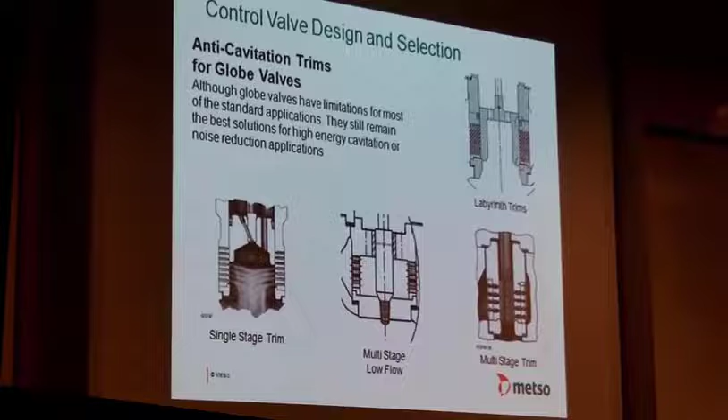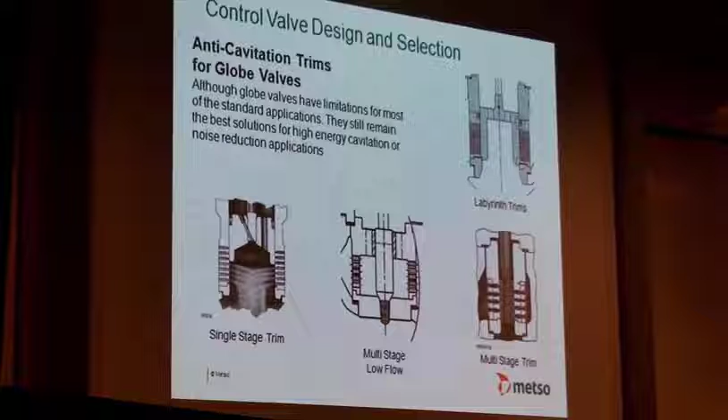When you start getting into the bigger size valves and the bigger flows, you need to go to multi-stages, and what will happen then is you'll have cages constructed for either 2 sleeves or 3 sleeves. The idea is you're building in all different kinds of friction restrictions as the flow's coming through - it has to expand and contract and fight its way through. You're just adding friction, absorbing the energy.

And then we've got labyrinth trims, which I'll show you on the next slide. Anybody done any work on labyrinth trims, labyrinth technology?

Okay, now with the trims, they're all capable of doing certain things, so they're working at certain levels. It's all down to just how much friction you can build into the trim to absorb the energy. With the labyrinth trim, basically you have a series of plates. The plates have different profiles cut in, so it's actually like a maze profile. As the flow is going through, it's having to change direction umpteen different times. What they do with all of these stacks, they assemble them into all of these plates, they assemble them into what they call a stack. So now you've got what looks to be a cage, but the cage is now made up of all these different ports and profiles. You can see a flow coming in and it's changing direction all the different times. In our trims, we do a trim where you can actually change the flow direction 300 times in one trim, so it allows you to absorb large amounts of energy. But the downside is, as you're building in the friction, you're reducing the capacity, so you end up with bigger valves, bigger trims. So you need to have these unusual valves like the angle valves again.

This trim you've got here is CCI drag technology, so their way of doing it is they spark erode their profiles into the discs - the same process, if you like, where you're adding all these multi-trims and multi-stages.

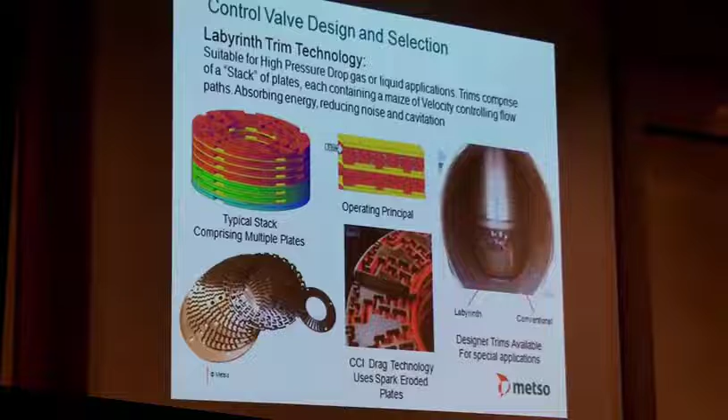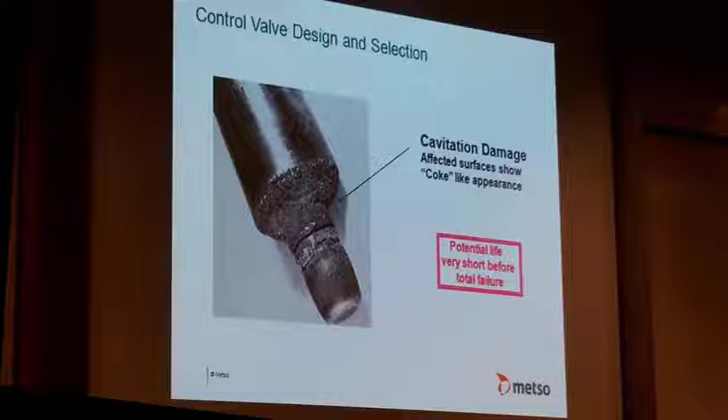One thing I like to point out is that people often think of control valves as relatively simple things, they don't rate them as anything special. But if you use a power plant as an example, the last job I was involved in was a plant called Guangdong in China. This was when I was at Fisher, and I think they had six 990 megawatt sets. From the point of view of power that's fine, but the reality is you have to put turbine bypass valves in - those valves are globe valves and they have to tolerate 990 megawatts while in operation. So whereas you think of the valve as simple, when you add that context it has to cope with all that energy and power, which gives it a slightly different meaning.

This is just a quick picture showing what cavitation damage looks like. It's like a cinder effect where you can see bits of metal ripped out. This is where you need to start putting specialist trims in.

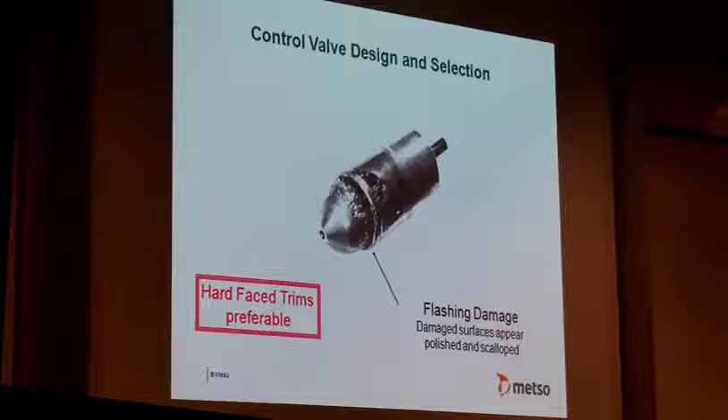On the other hand, if you've got flashing damage, the flashing is more like an erosive application, ripping scallops out of the trim, wearing the trims away. That can be rectified with hard face trims - they'll tolerate it. Or where you've got severe flashing, use angle bodied valves where you're flashing into the outlet. On the Guangdong job we had massive flashing because they were dealing with very low pressure condensate and steam, so everything was wet. They ended up putting special baskets at the base of the valves to absorb the energy of the flash as it came through, to stop it wearing the pipework away.

That ends the presentation from where we are there.

When I first started with Metso, coming from Fisher, the world at Fisher was all globe valves, but when I arrived at Metso it was all rotary valves. So I had to find a way of showing people what you could and couldn't do with globe valves versus rotary. I started putting a database together of various applications and processes to compare the two. But since doing these presentations, I've adapted it because Metso manufactures all the valves. So now you can use this tool as an easy guide to pick and choose what valve is best for you.

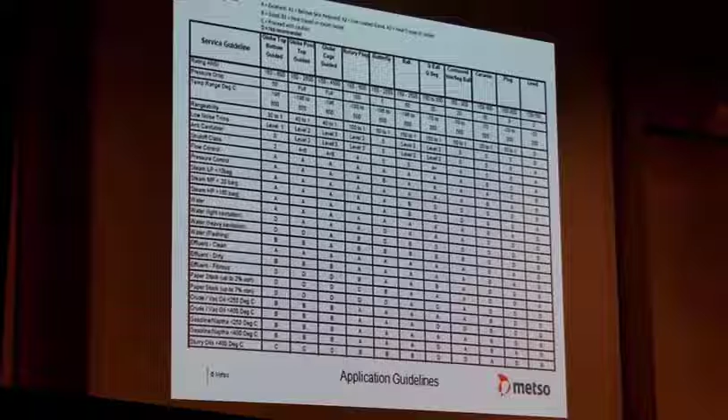They're down as A. And if you're looking at a butterfly valve on flashing, that's down as B, because you're likely to get localized wear and tear on a butterfly valve.

So now you can look through the applications you've got here, and check and find out which valves are going to be best for the application. Because each of the valves has got its merits, the key factor is for you guys as engineers to pick the valve which is best for the job.

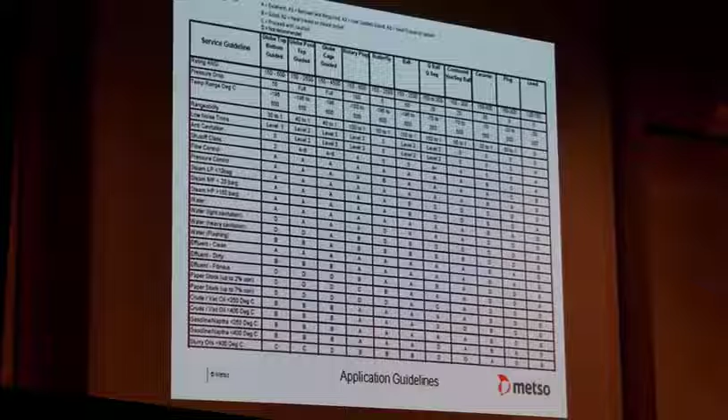So it gives you the opportunity now, instead of saying, well, I've always used these, I'm staying with these even though it breaks every 2 years, you can now consider some different options. It gives you all the choices as to what you want to do. So you've got 2 of these now with all the different applications that I tend to come across.

But obviously, myself, I've been in the business now for 37, 38 years. Colin? So Colin's catching me up, but obviously much younger than me.

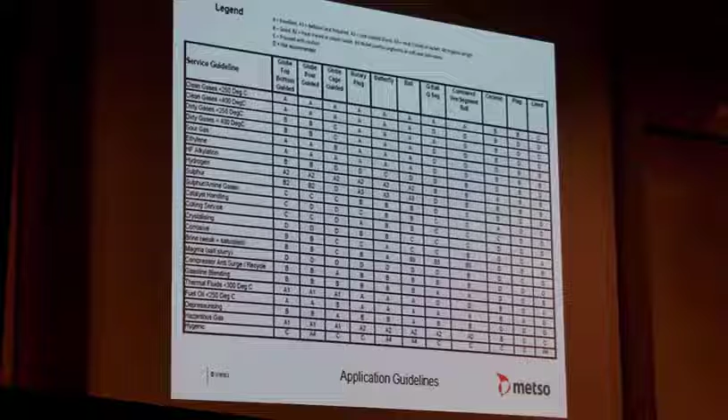So if you do need any help on specific applications, we'll give you the information, we'll give you the guide, but it won't necessarily be the big sell. It'll be more about easing you through the process, because not everybody uses Metso valves. It's all about picking the right valve for the job. So that basically finishes my show for you, gents.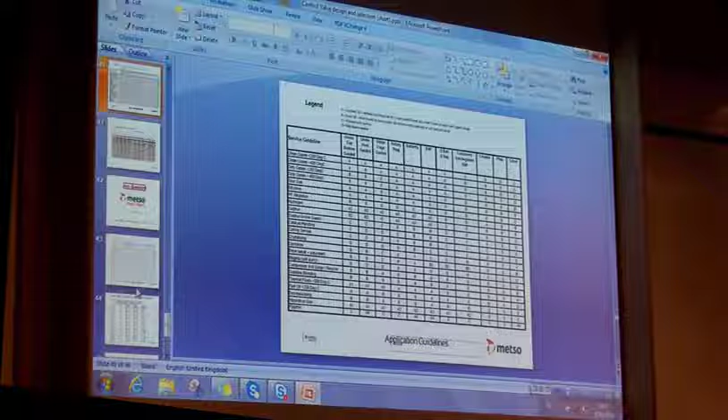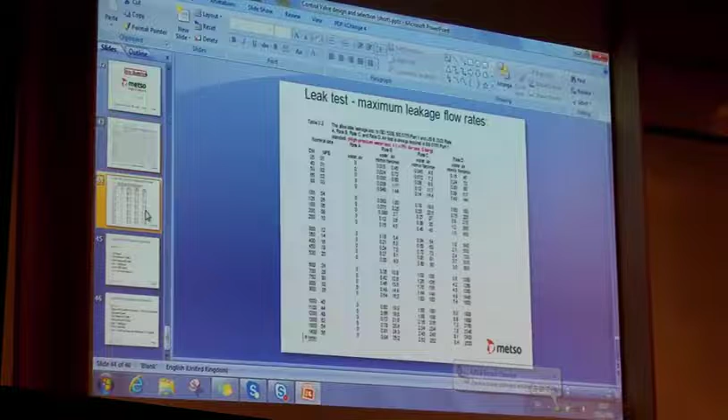Any questions? You haven't mentioned shut-off classes. It's funny you should mention that. Glasses, one second. Used to be in the industry, but I didn't know whether you'd want to see this, so it's here but it's hidden. No, one second. Right, what are we doing with it?

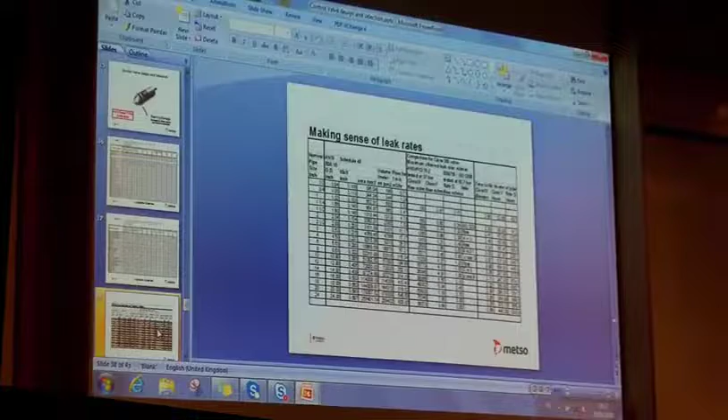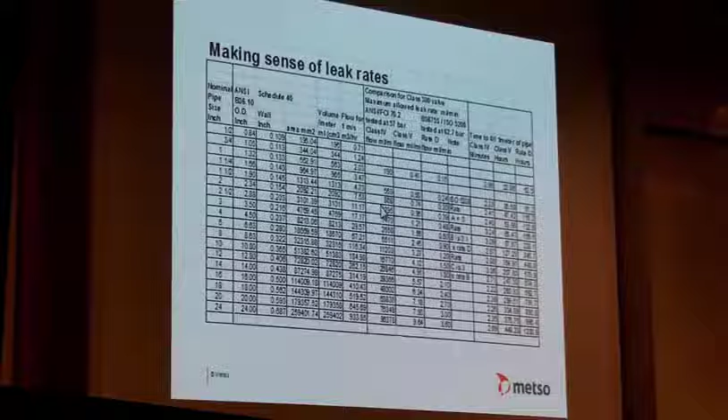I mean, typically they've always been rated in 2 forms. When you're looking at control valves, they tend to be rated in the ANSI format. So ANSI Class 2, ANSI Class 3, ANSI Class 4, ANSI Class 5, ANSI Class 6. On the older, cruder control valves, the shut-off classifications were down as ANSI Class 2, and ANSI Class 2 is a quantifiable number based on a CV.

But when you're looking at the more modern control valves, they tend to be Class 3, Class 4, Class 5, and Class 6. Depends on what you want to do with it. The normal shut-off class for a control valve will either be ANSI Class 3 or Class 4, because most control valves are designed to leak.

However, there are processes where you might want your control valve to be a shut-off valve as well as a control valve. If I look at reactor steam or reactor heating valves, if you've got a valve with a leakage rate that's continually passing the heating media through to the reactor, it cooks the reactor and damages whatever's inside, because the key factor on reactors is keeping the internals clean, whereas if you're baking whatever's in there, you end up with residues and dirt, and it's a nightmare to clean.

So one of my colleagues came up with this unusual system where it's worthwhile thinking about what you're actually asking for, because there is a cost added to the shut-off classifications.

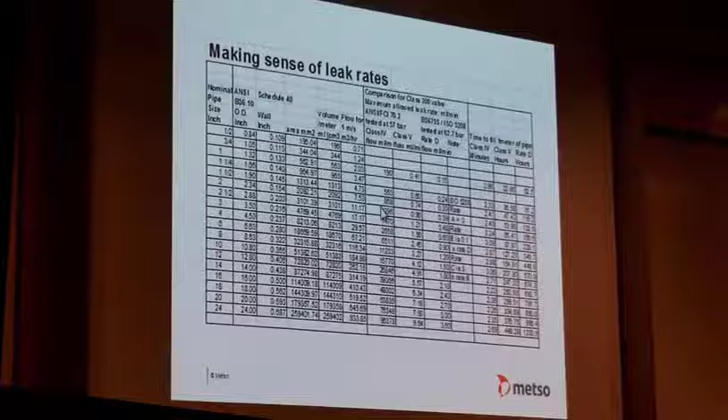But if you're looking at butterfly valves, especially with triple offsets, you can get reliable tight shut-off as well as control with the butterfly valves because of the triple offset design. They're self-cleaning, the trims on those.

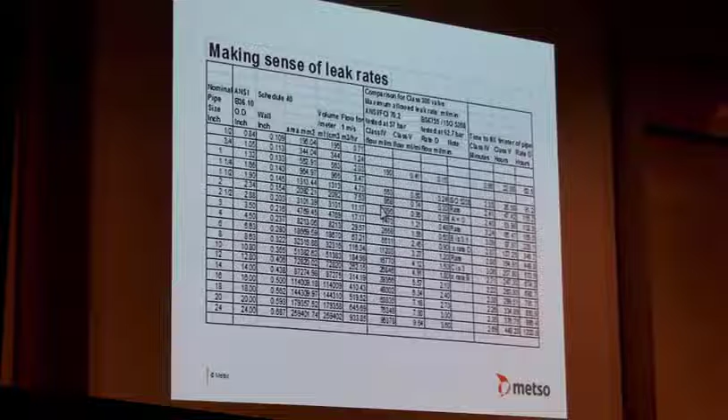Yeah, this was a thermal oxidizer rather than an acrylonitrile plant. I haven't seen anybody building any of those for ages now. They used to be big business about 15, 20 years ago, everybody was having them, weren't they? Only got them in China now. We manufacture in China, so we're all right.

Any other questions, gents?